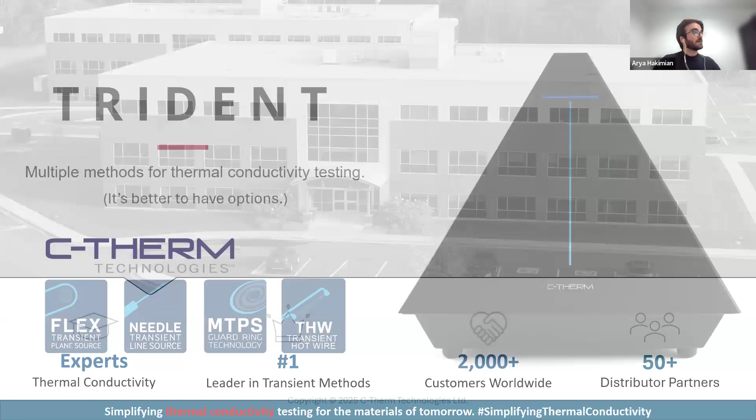The instrument that is featured in the data collection, and our core product here, is Trident. Trident was developed as a modular platform, providing different methods for thermal conductivity testing. The idea behind Trident with the modularity and the different options is to provide just that, different tools to address your specific task at hand. Sometimes this is related to the type of sample you're looking to test, the size that you have available to work with, or the testing conditions of interest. Being able to pick and choose the best option is really going to give you your best chance for success on the data collected.

And this quote here, it's one we like to use, and it really embodies the idea behind Trident: when all you have is a hammer, everything looks like a nail. This stems from the fact that if you're locked in with just one way of doing things, you're going to try to make everything fit into that bucket. And a lot of times, really good methods that might do really well at testing a solid material aren't great at doing, let's say, a liquid. So being able to pivot into a method that is best suited for that sample or that testing profile is going to ultimately give you your best possible data output.

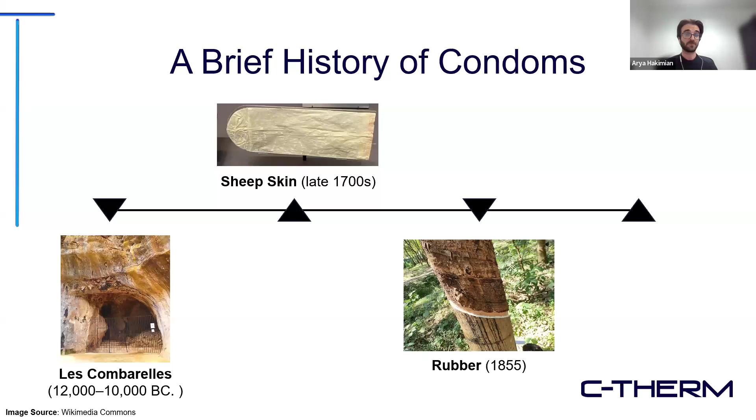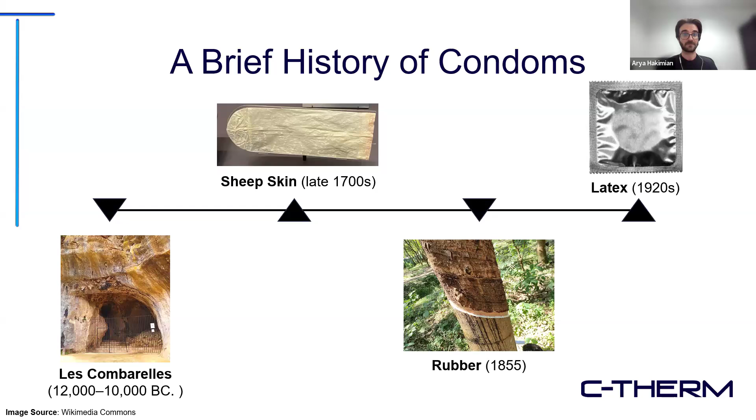And then most notably, and really where we stand today, latex was introduced in the 1920s, and this has been predominantly the main material used in the development of condoms that we know today. So latex condoms. Latex is the most common material used in condoms. It makes up about 80% of the total market share. There are non-latex versions, and we'll do a quick comparison of performance between a latex and a non-latex material coming up. But of course, there are also still some of the animal skin products that are used in a much smaller percentage, but they still exist today.

Now, in terms of latex manufacturing, the process essentially involves this dipping process, and within there is the combination of both thermal and chemical processing in order to go from that liquid latex state to the formed product. And looking into some of the processes here, a lot of the quality assurance testing that is done in production involves the mechanical side of things. So this will dovetail nicely into what Ario will be speaking about in his section, where those mechanical properties are also quite relevant.

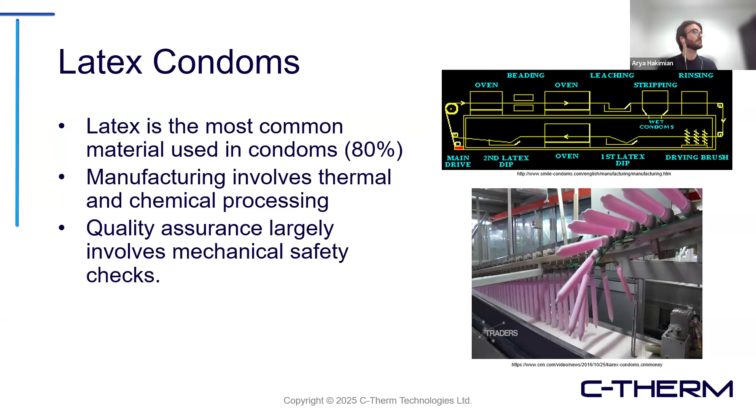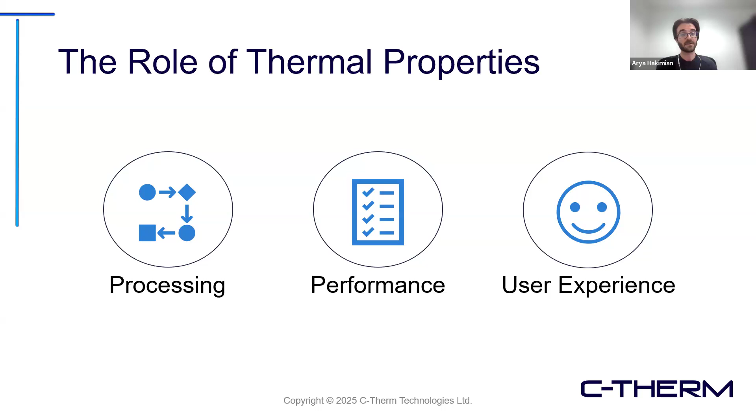Now, focusing here on the thermal side. The role of thermal properties comes into a few different areas: as I mentioned, some of the processing, the performance of the material itself, user experience. A lot of this is inherently related to the thermal characteristics of the materials involved. And thermal conductivity is a key parameter of interest for many groups. Thermal conductivity, of course, defines a material's ability to transfer, conduct heat energy through a body of material.

Interestingly, to note that, again, depending on the application, sometimes a high thermal conductivity is desirable, and sometimes a lower conductivity, more insulative, is the goal. So high or low thermal conductivity being good or bad is quite subjective to the application in mind.

One thing to note about latex is that, generally speaking, it is more on the lower end of the thermal conductivity range when we look at all the materials that exist out there that can be tested. So latex, depending on the specific formulation, the considerations on the processing and the density, is typically around 0.1, 0.2 watts per meter Kelvin. It can be lower or higher depending on how you're treating it, but it's generally on that lower side of the spectrum.

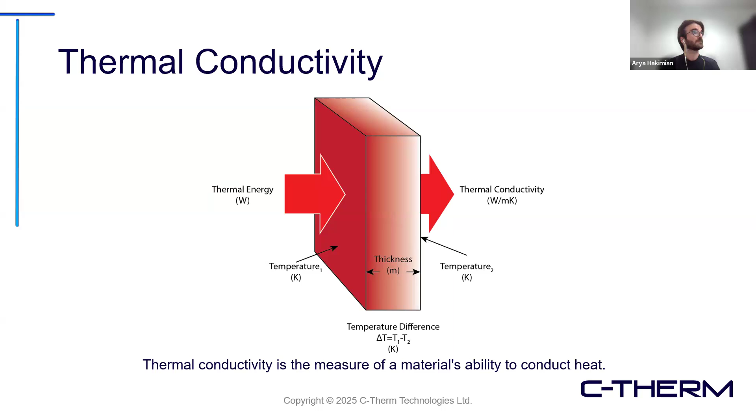And again, looking through what's available out there in industry and products that exist, there's been some interesting work in next gen condoms introducing additives and fillers like graphene. We do a lot of work with groups in different industries where fillers are being introduced into materials. These are, of course, used to tailor specific performance criteria. For example, thermal interface materials are a polymer, but you're adding in quite a lot of conductive fillers in order to hit a certain threshold of performance.

And interestingly enough, this is also happening in the condom space. So graphene introduced, you can see some of the marketing claims, 85% more body heat transfer through the material. Kind of interesting to see that, as materials in general are advancing, we're seeing really any industry trying to adopt some of these similar ideas in how to further improve and enhance performance.

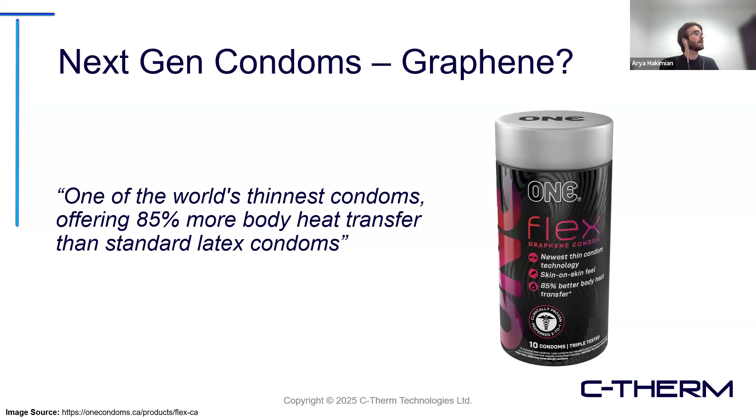Some interesting research I found here is actually on some work to develop an inherently new material for condom application. So hydrogels. Hydrogels aren't what I would say necessarily new. They've been around for quite a while, but Dr. Robert Gorkin, who's a researcher at a university in Australia, is actually pioneering some research on the development of hydrogel-based condoms, which has some interesting applications.

There is a lot of work being done in industry and also in academia using hydrogels as biomedical scaffolding materials. So you can actually impregnate the hydrogel with a specific drug, antibacterial, for drug delivery in a variety of applications. But for use in condoms, where a lot of the lubricants or medications are being coated on the condom itself for improved protection and health considerations, there's a potential here to actually integrate that directly into the material of a hydrogel. So interesting to see where some of the groups are focusing research.

And yeah, again, like I mentioned, the 1920s was really where latex began to be a predominant material used in condom manufacturing. Who's to say in a few years it might not shift to a new material with some other advantages to take into account.

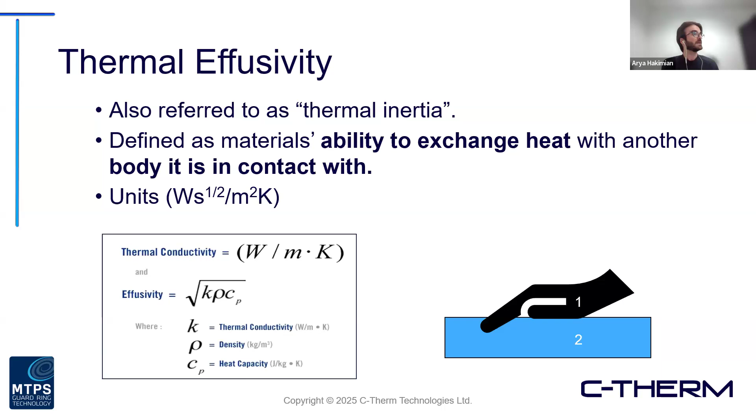A lot of work in the effusivity space revolves around textiles and fabrics. So, like the shirt that I'm wearing, this thicker, warmer feeling material is used in a lot of winter wear where you want to feel warmer or cozier, whereas someone developing a product for the summer where you're trying to keep things cool might want to use something else to accommodate that level of comfort.

There's been some work done in collaboration with C-Therm and a few different industry or academic researchers. This has been featured in some previous webinar content, but work with the University of Oregon looked at correlating the perception of a human touch panel to the effective thermal effusivity of these materials, trying to quantify where the effusivity values line up with the perceived feel of a human subject.

So generally speaking, higher thermal effusivity will correlate to a cooler feeling material, whereas something lower in effusivity is warmer feeling. But tailoring that specific output can be important, because if you have something that is too high in thermal effusivity, it's going to feel too cold on you.

That may be beneficial in some areas of application, but in terms of user comfort in others, it may be a negative. So looking at it from a lens of thermal conductivity and effusivity can provide a nice framework for quantifying the overall picture and how those materials will behave.

And of course, a condom is going to be in direct contact with the human body. So understanding that as a performance metric can also provide some different benefits to both the R&D side of things, as well as looking at production and ensuring that it is meeting specific requirements of those groups.

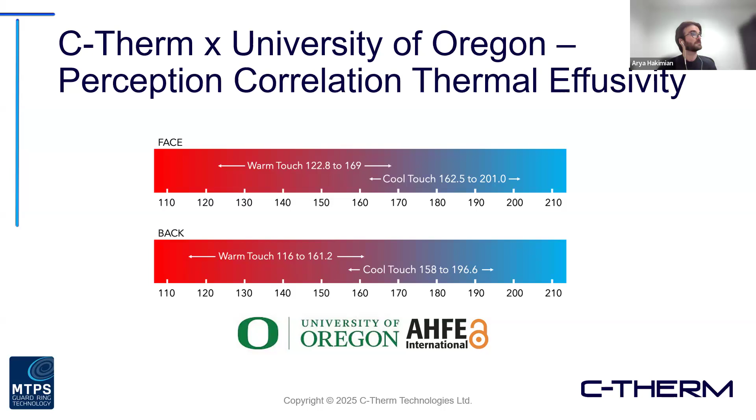Now, coming back to the idea of the thin film, because inherently a condom is a very thin sample. Testing thin films is an area that is sometimes challenging due to the inherent size of the material, the thickness that you have available. Many techniques out there in industry, while very poised to test larger bulk materials, a variety of insulative or conductive samples, can sometimes be challenging with something like a thin film.

When we look at the options of how to best approach testing of something of that nature, micron range thickness, the TPS, or Transient Plane Source, really comes out as a front runner and one of the better options that exist. The TPS, which conforms to the ISO 22007-2 standard, has some specific guidance on how to do thin films characterization. It's a specialized function within the Trident platform that we offer for testing samples of that size.

If you've never looked at how this happens, I'll give you a very high-level rundown of the process involved in testing thin films with TPS. It's essentially a three-stage process. We have our TPS sensor, and we will always have a conductive backing material, which is placed on either side of that sensor for testing. The first measurement we always do is just with the backing. There's no thin film involved. This is to establish our blank or base point, our zero measurement for the system.

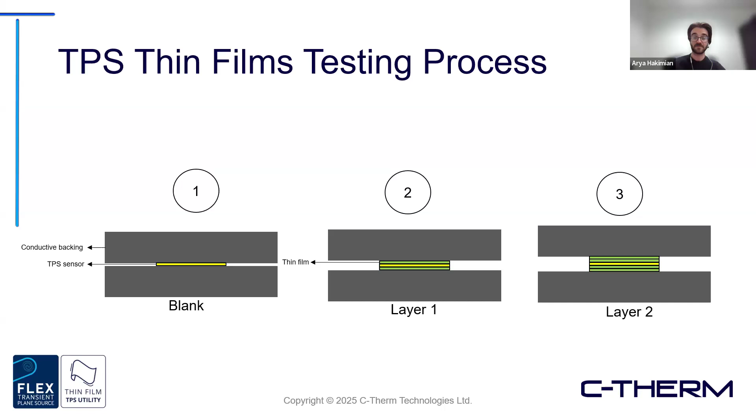But essentially, it's a three-part test. Start with your control, one layer of film, two layers of film, and we're looking to assess the linearity between those points.

This has been featured in previous content, but here are some examples of more standard thin film materials tested on our system. Whether it's something like Kapton or Mylar, thermal conductivity does range depending on the material you're looking at. But generally, the 0.1 to 1 watt per meter Kelvin range is where most of the thin films that we see come in.

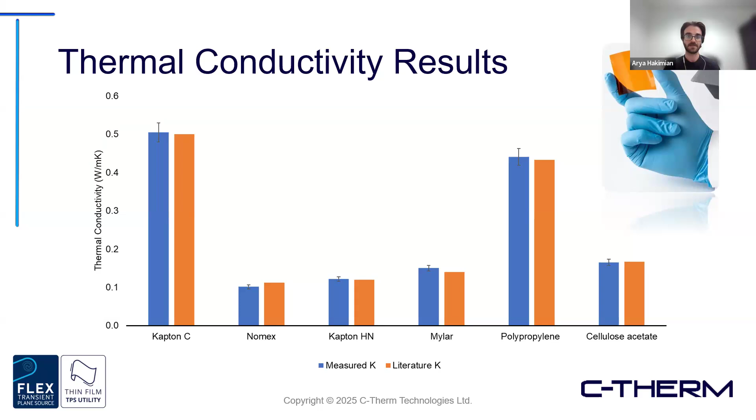All right, so this brings us to some of the actual application data that we collected on the condom samples. In this study, we did a quick assessment looking at the difference between a latex and a non-latex condom, trying to see: are they similar? Are they vastly different? And where do they fall? We did this from a thermal conductivity perspective using the TPS thin films setup for the conductivity measurement.

And then from the effusivity side of things, this was done with the MTPS, or modified transient plane source. The big difference in the setup here is that for the MTPS, due to the thickness requirement for the sample, we need to stack up enough material to achieve a few millimeters of thickness, compared to the thin films option, which is just taking a couple layers of the film for the testing.

So on the far left there, you can see the TPS thin film setup. Again, quite simply, the TPS sensor with that conductive metal backing, which is a stainless steel, and then some of the condom that was placed on the top and bottom side.

But from a results perspective, we can see that comparing the latex and the non-latex versions, there was a notable difference in both the thermal conductivity measurement tested on TPS and a very similar trend observed in the effusivity from the MTPS. So again, showing that the non-latex version actually was higher in thermal conductivity than the latex counterpart.

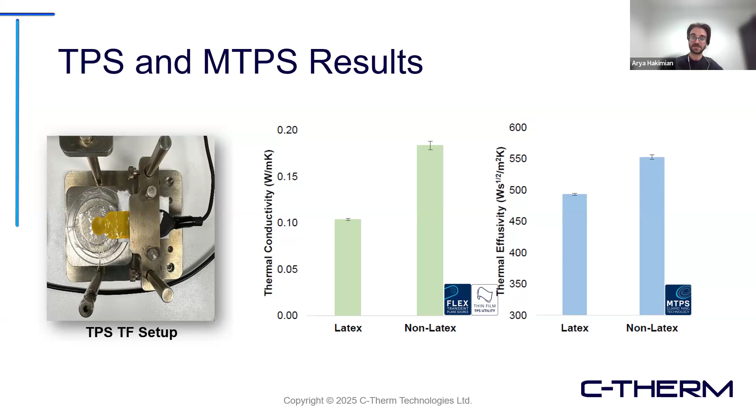But this brings me to the end of the conductivity side of things. At this point, I'll invite, again, my colleague Arya to jump in and take us through some of the DMA.

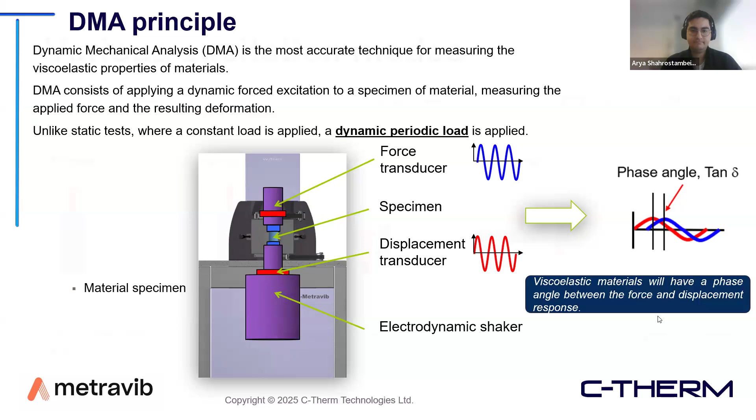So DMA, as I mentioned before, can deform your sample for testing purposes. And this deformation can happen through a variety of deformation modes: tension, compression, shear deformation, and bending. For this application, for condoms, we use tension deformation since it's more related to the deformation happening to the material in its use.

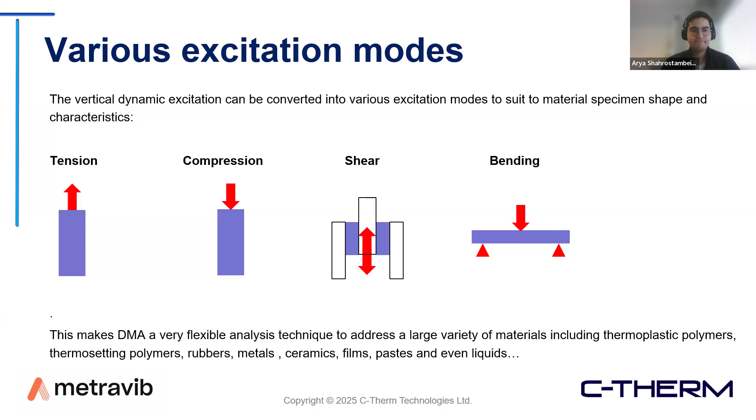And again, if you want to dive deeper into these terms, you can watch the other two webinars on application and theory of DMA. And the other component is the loss modulus, or the ability of the material to dissipate the energy through heat into the matrix of this material. A very important parameter, especially for this application today, is tan delta, or simply the ratio of loss modulus

over storage modulus. This parameter is very important for us, especially for the glass transition temperature, since obtaining the glass transition temperature of polymer and viscoelastic materials using tan delta is the most accurate method that currently exists. Compared to classical methods of obtaining glass transition temperature, for example DSC, obtaining glass transition temperature using tan delta and a DMA test is 100 times more accurate than other methods available.

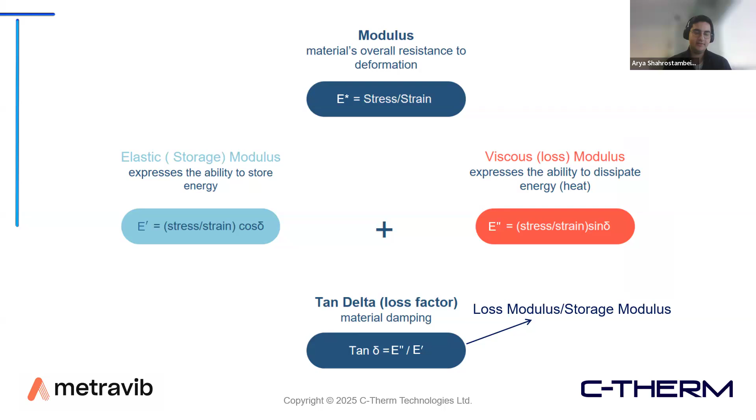By heating up the material, you will hit the transition region or the glass transition range of the sample. And if you keep heating up the sample, you will be in the rubbery plateau region, where the material becomes softer. And it's very important in terms of application and how the material functions at different temperatures. For example, starting from glass transition temperature, the material starts showing behavior of a rubbery material, which is very important.

And that's why it is very important to understand the glass transition temperature and in what state in terms of stiffness our material exists at a defined temperature. And by heating up a sample higher, the sample will experience the viscoelastic liquid, which is the softest state of viscoelastic materials.

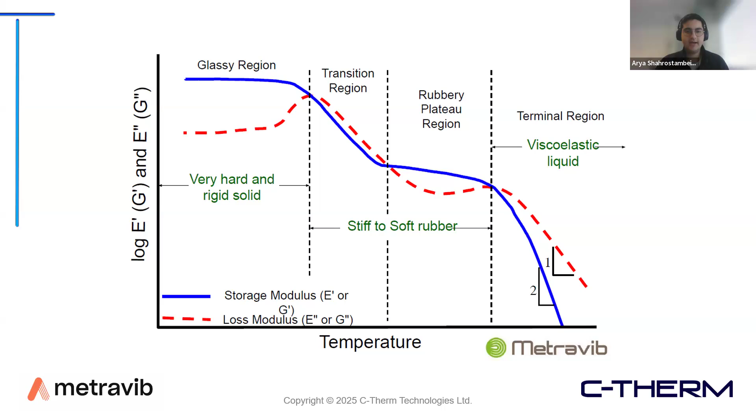It is important to mention that Tg shows itself with the material becoming softer. So other methods that use, for example, energy to calculate the material becoming softer are more complicated, and there's more calculation to that. But the way DMA works is, the material is becoming softer, and DMA mechanically deforms the sample. So it's more of a direct measurement, and DMA is more sensitive because it's directly evaluating the softness and stiffness of the material. So the response will be recorded quicker and more accurately. And so again, a peak in tan delta shows the glass transition temperature.